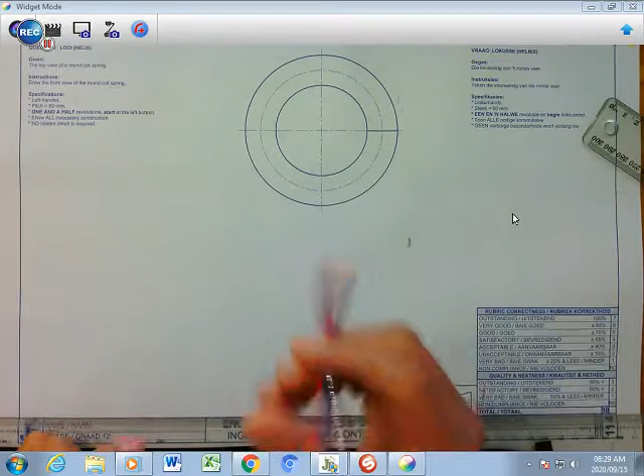This is the helix coil spring, which we are going to draw now, and it shows the top view of the coil spring. This is the top part where it stops.

You must draw the front view, which is in this section over here, and then you need to draw it with a left-handed turn. A left-handed means that it's going to be clockwise. So I'm just going to write there: clockwise.

There's a pitch of 60, so I just want to write in this information. They want a turn and a half, so it's 60, which is one turn, plus a half is 30, and that gives you 90. Then for every pitch of 60, there's 12 spacings, plus the 30, which is 6, and that gives you 18.

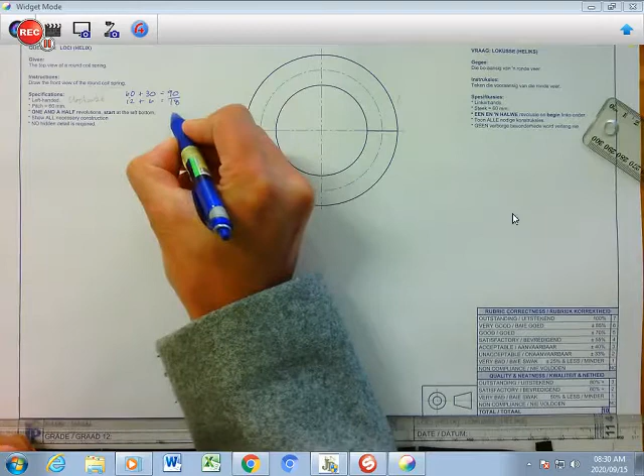And then you divide that. It gives you 5 millimeter spacings to be able to show how the coil spring actually moves from bottom for 1.5 revolutions up. You must show all the constructions, and there's no need for the hidden detail to be shown in the drawing.

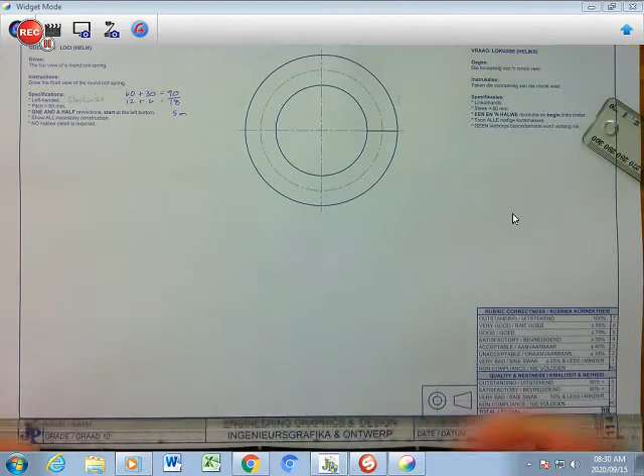So the first thing I'm going to do here is take my set square. What you need to understand is this is actually a circle here. It's a coil, meaning it's a circular shape, and that's why we're working only with the center lines.

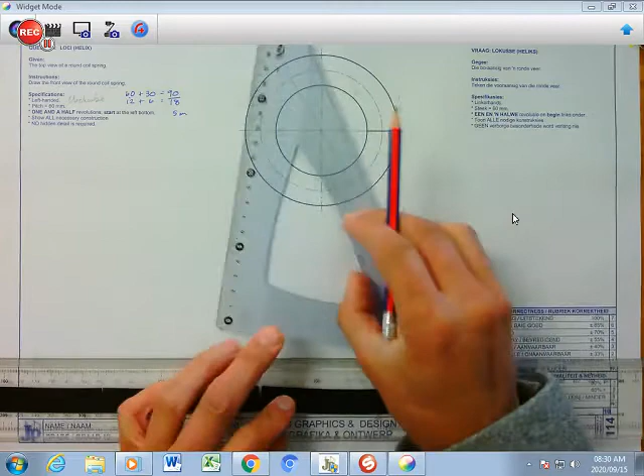So what I'm going to do is divide my circle into the various 12 slots through the midpoint, like that. So that would be 60 and 30.

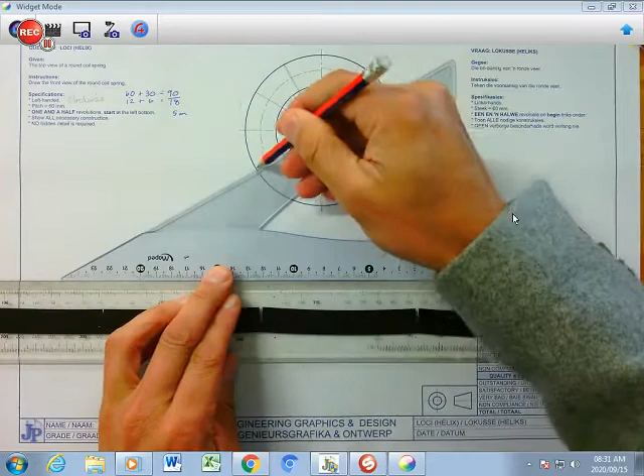And I flip my set square around through the midpoint there. So now I have 12 points, and I want to label them, but I'm not going to work with either the outside or the inside circle. I'm actually going to work with the center, because I'm going to have circles around it to show.

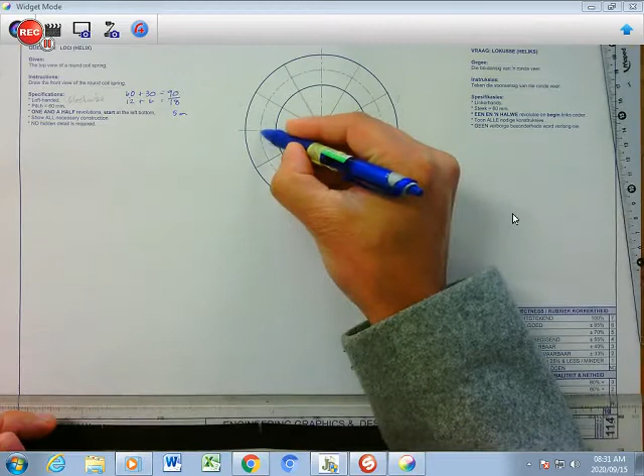So there is going to be the first point, and there is going to be the last point. And then I'm going to have these points here on my center line of my circle. Obviously the points are mirror imaged at the top, so I don't need to point these out, because that would work in tandem. These two would work in tandem.

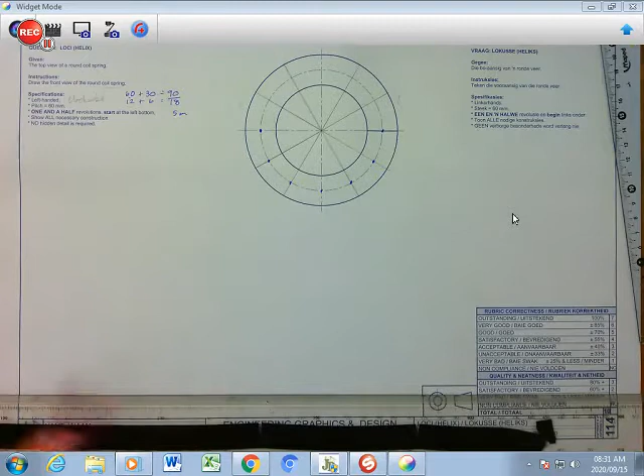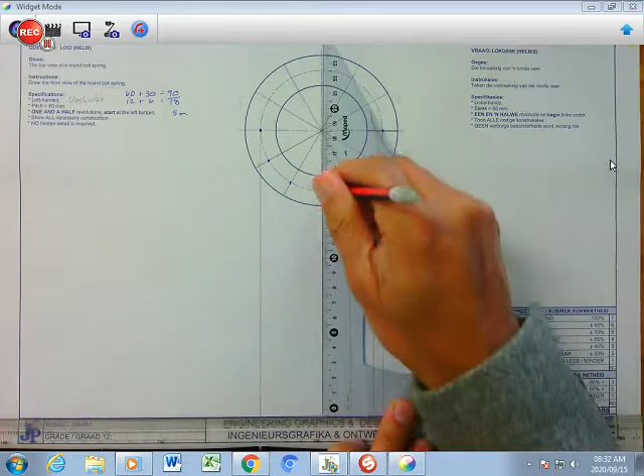Then, learners, what I am going to do is project these points down. So there's the one, both on the outside first, and then I'm doing all the inside points here, down, the midpoint, and the two in between it, right, like that.

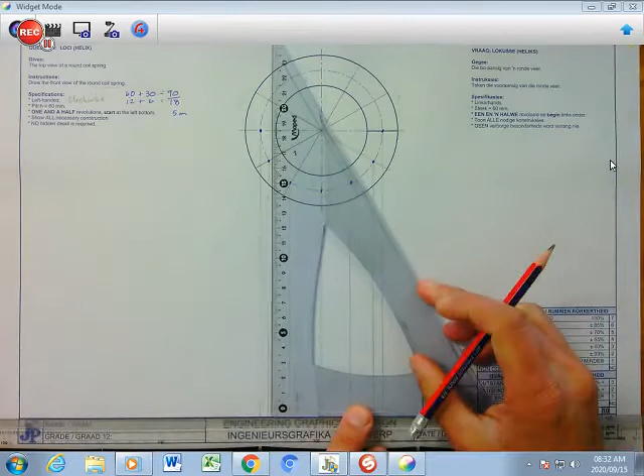I just want to make sure that this is 100% straight. Redo that one. Okay, let's do it again. Here we go, and that one over there.

So I'm going to create a little start, so maybe I should start over there. There's my start, and then I know from here right up I need to have 18 spaces, of which I should have 5 millimeter gaps. So 5 times 18 gives us a perfect 90.

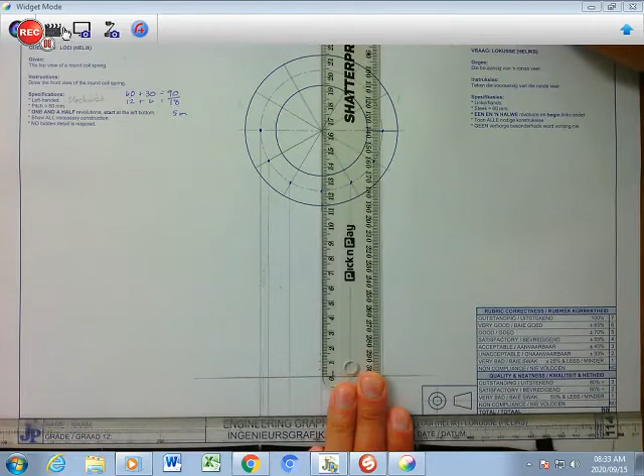I'm going to do it perfectly on the halfway mark, and I'm going to start with 5. I want you to understand it's 5 millimeters, and then 10, and then 15, and so I'm going to carry on and do all of those very quickly. Right, let's do that.

So there I've created my 5, and I went up to 90, and you can count here that I actually have 18 spaces of 5 millimeters each. And what I've done, I've drawn lines across like that, parallel for the 18 spaces. So now I'm going to plot.

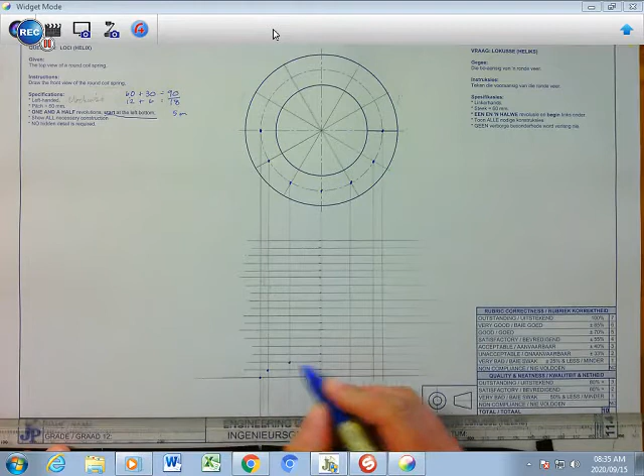What they want is for you to start at the bottom left. So bottom on my left hand side here, that's my first plot. Second, you're going to carry on with your plotting.

Now I like to plot halfway and then just draw a line like that. But in this case I don't even need to do that because I'm going to be working with circles, and I'm going to draw a circle around each of those. So one up every time.

Clearly the midpoint, this is the midpoint of every circle. If you see how I'm going to do it next. Obviously when you go like that, that is one turn there, and a half a turn will end over there. Okay, I hope we are clear on that.

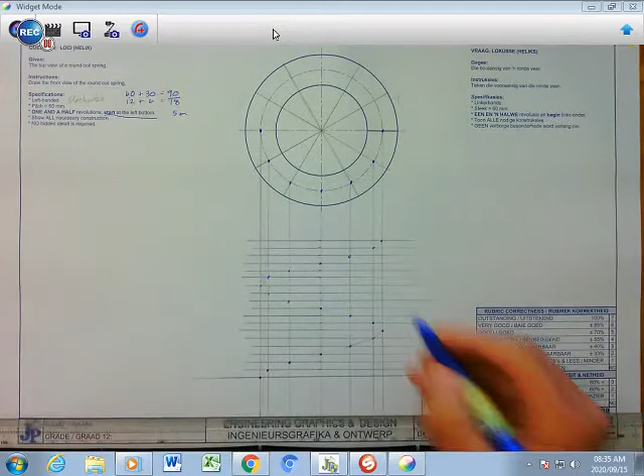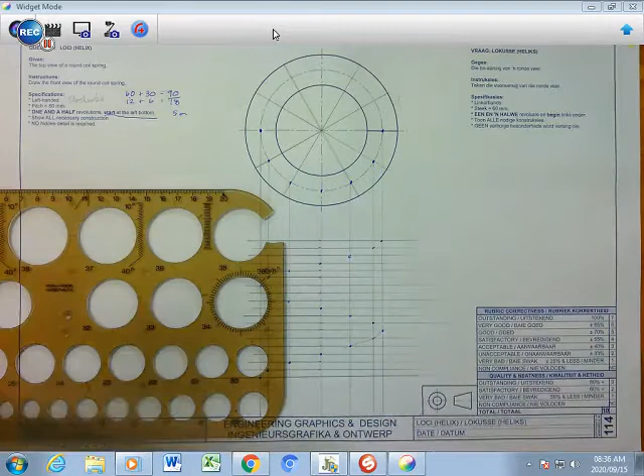So now that I've plotted, I'm going to take this size here, which is 20, and I'm going to look for a 20 millimeter circle, and I'm going to draw a circle around each one of these particular midpoints.

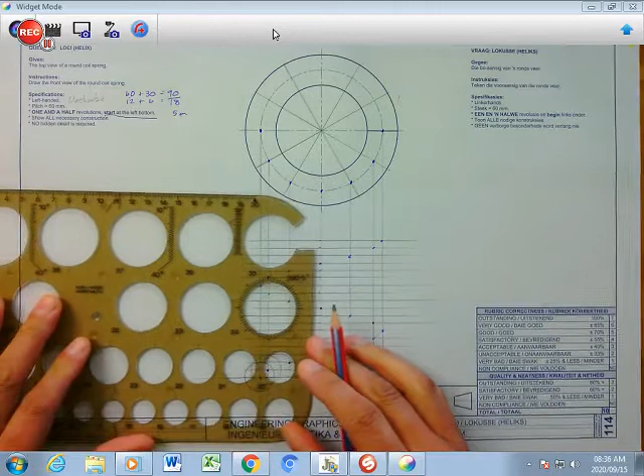So I'm going to perfectly align with my midpoint there, and I'm going to start drawing that, and move to my next midpoint, which is there, and it's going to overlap, which is fine. Just make sure that each point forms the midpoint of the circle, and then that's my third point that I'm going to be drawing there, and so I can proceed with all my circles right up like that until it gets there.

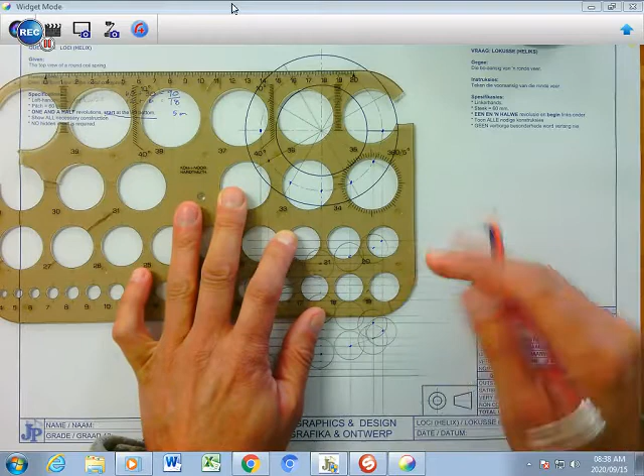So let us do that quickly. Here you can see that I'm actually finishing off my circles there like that.

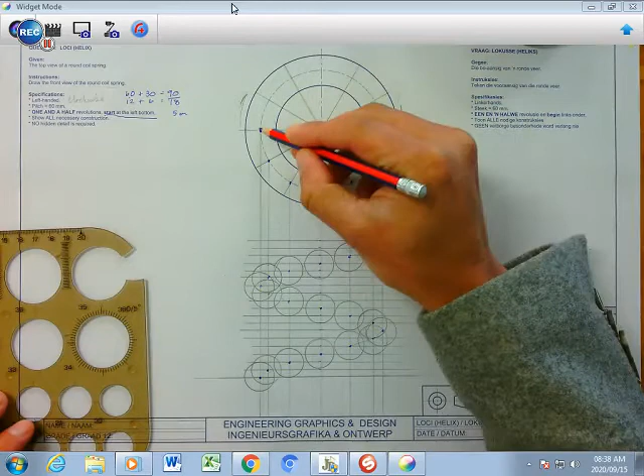Okay, so if you look at the turn, it's going to be left-handed, which is clockwise, which means it's going to go like that around. So from here it's going to go that way around. So I'm going to be able to see the circle here, so I'm going to darken the circle.

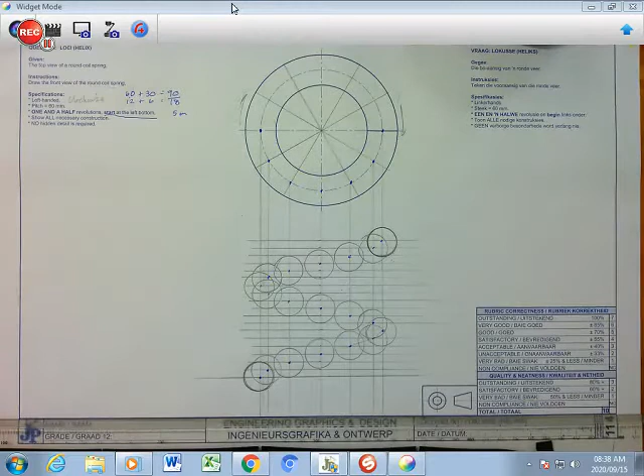And then I'm going to add hatching to that particular circle, and darken the circle here. The top, those two circles will face me as I look at it. So I'm going to take my 45-degree set square and darken that by hatching that start circle, and hatch that circle over there as well, just like that. Perfect.

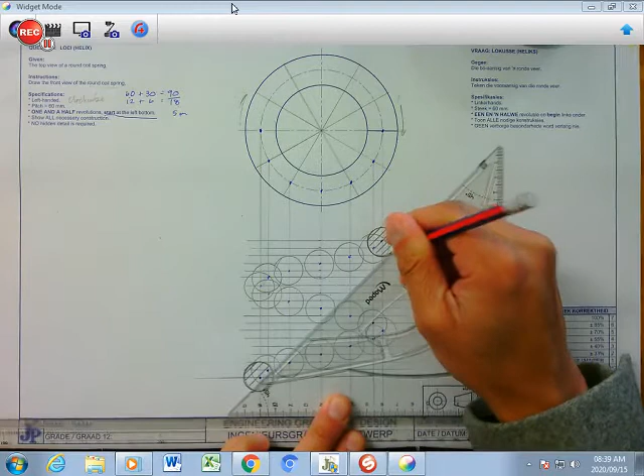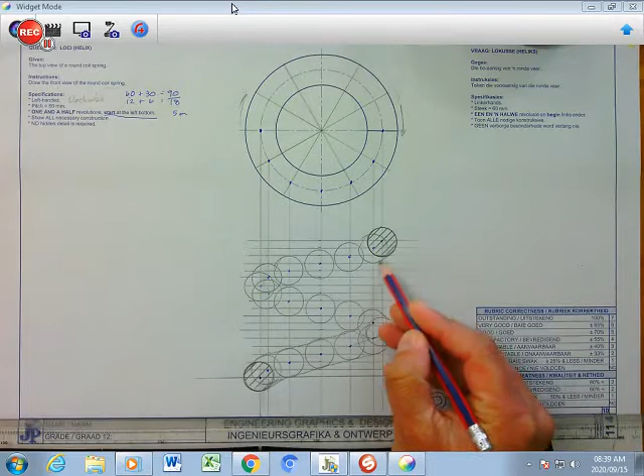Now I'm going to draw lines touching the circumference of all my circles till there, both sides, and it curves like that. So you just draw, and then I'm going to take it down like that as well, faintly, till that mark point there, and then you go this way.

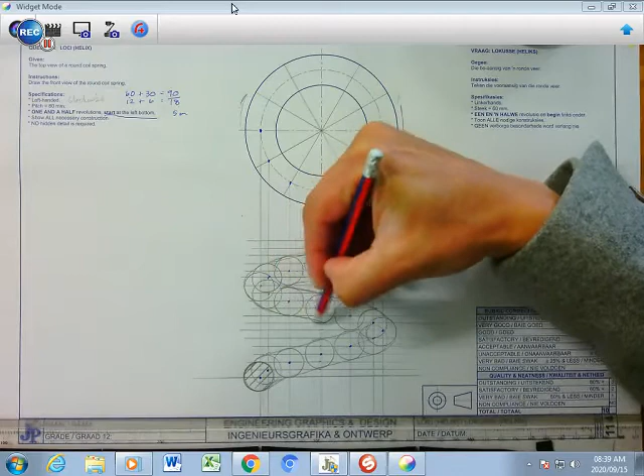It's like a little sketch activity which you are doing. So there we go. But please make sure that you just shave along the circumference of all the circles that you have there, making this shape nice and round.

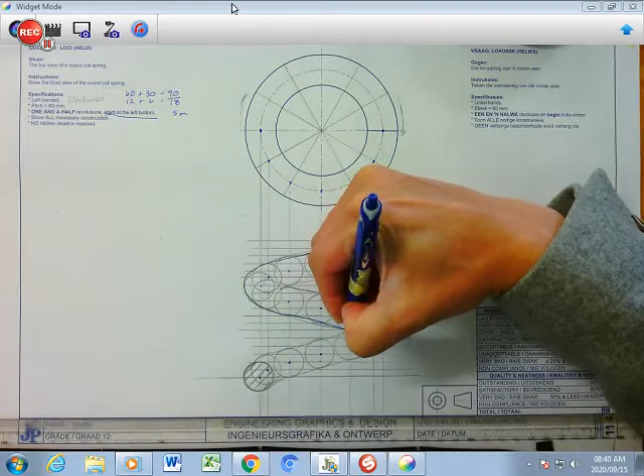And then once you have that, I want you to darken that for me. Right, so you go over it and darken that neatly. Go right down, so there, and then right down, so there.

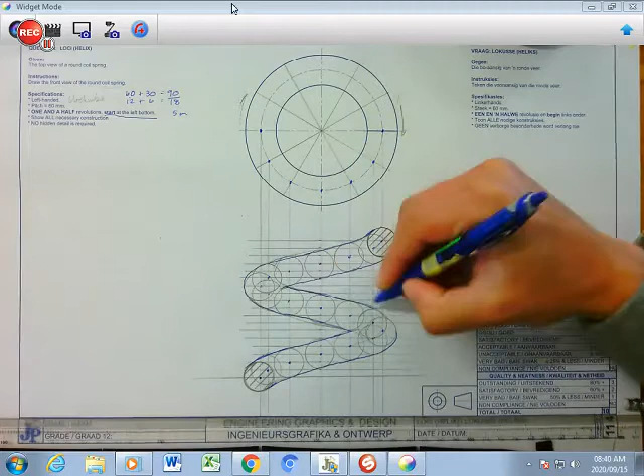Okay, it curves nicely there. Then you go and do the other side as well, very neatly over the faint lines that you've drawn, so in that corner point there. Okay, almost done.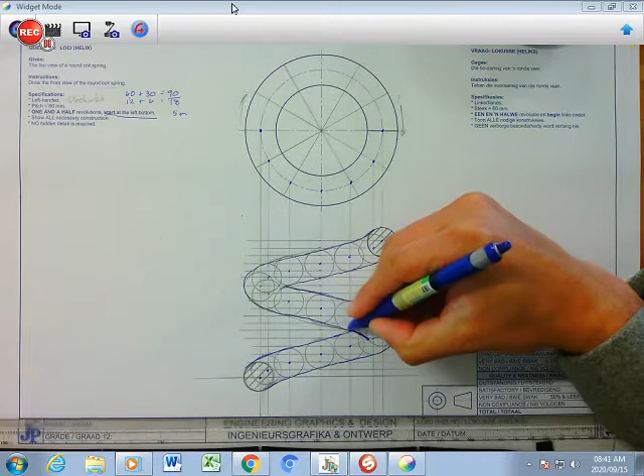Now remember, this goes like that and in front. So when that goes in front, you need to show the effect that this actually goes in front. So this line is going to be drawn slightly down like that, to show that this curls in front, that curls at the back. So that's the effect that you will see, that this actually turns in a clockwise direction.

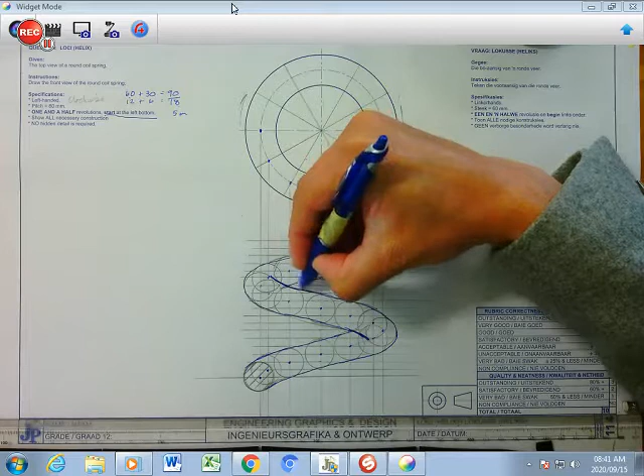And then when that goes down, this one goes up like that there. Okay, so you take it halfway in there like that, and you will see the effect of it. Great stuff, that's all I need you to do for me to be able to draw the coil spring. Enjoy.